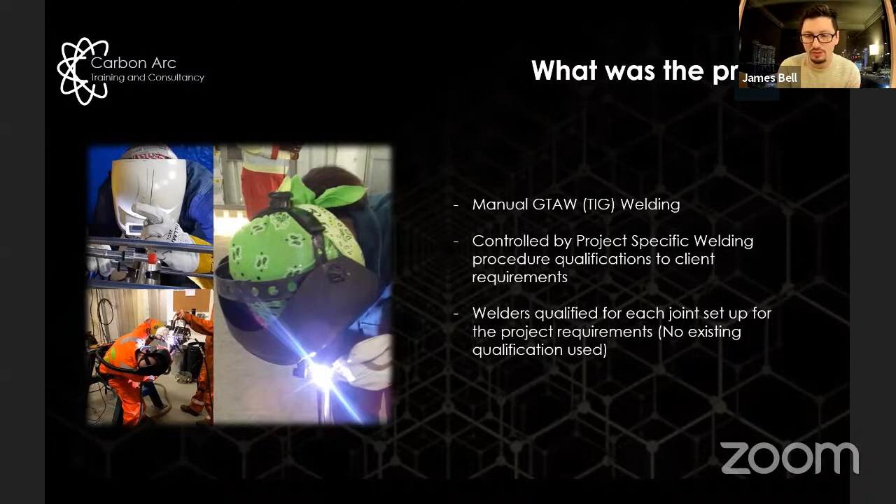If they qualified on a butt weld and they needed to produce a fillet, we had to do 2 qualifications, on every material grouping, on every thickness they would work to, etc. So everybody had been requalified for the job, procedures all brand new, and we had very good faith in what was happening.

The material was all super duplex UNS S32750 tube, again, produced directly for the project to order, mainly from Sandvik in Chomutov in the Czech Republic. And they're all small bore tubes. So they ranged from 12.7 mil to 1.5 inch, 38 mil ID, with a wall thickness between 1 to 2.5 millimeters. So these are very small tubes.

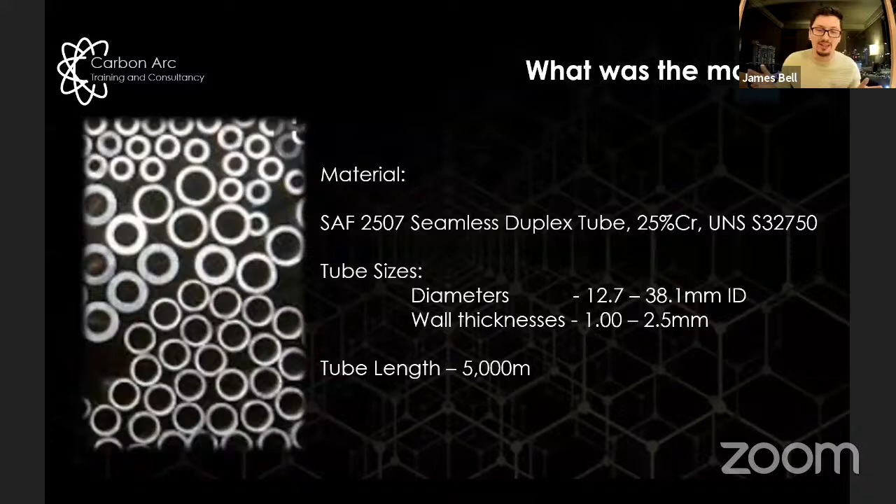Umbilicals are made up of not very many tubes, a bit larger than that. And they were delivered to us in 5 kilometer lengths on reels. So when we had a failure, we literally had 5 kilometers between our welds.

Now, the Fischer Feritscopes we were using, if you haven't had very much experience with them, are basically made from an iron probe in a plastic sheath, and they produce a magnetic field. And when the AC magnetic field comes close to the part, the ferrite content within the steel increases the voltage level, and the machine reads that to a corresponding ferrite reading. So you can see here, as the part comes closer, the magnetic field gets larger, the voltage goes up, and the reading then goes up.

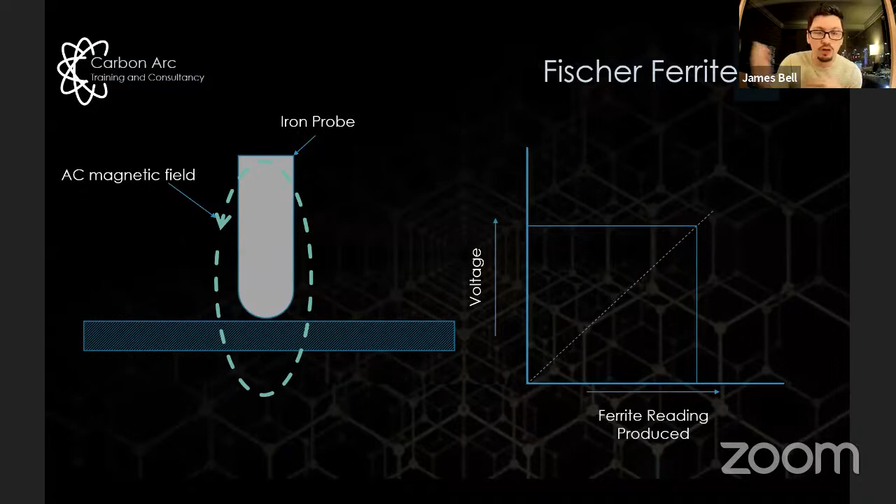And the way we calibrate that machine is to take a known ferrite sample, touch the probe on the surface of it, and set a reading of the magnetism to a percentage value. Yeah, so that's how it works when we use it in production. We're going to take the probe, touch the sample, and it's going to basically compare the reading we made during the qualification test: is it greater or less than that value, and what percentage would it be?

For our project, we had to take readings from 3 locations around the OD of the tube. So this is position 1, 2, and 3 on the left, with at least 120 degrees between each position. And then we would take, say, from position 1, the 12 o'clock position there, 3 readings from the weld metal and 3 readings from the heat affected zone. And the average of those 3 readings needed to be between 35 to 65% ferrite, which is the normal acceptance criteria for welds in super duplex material.

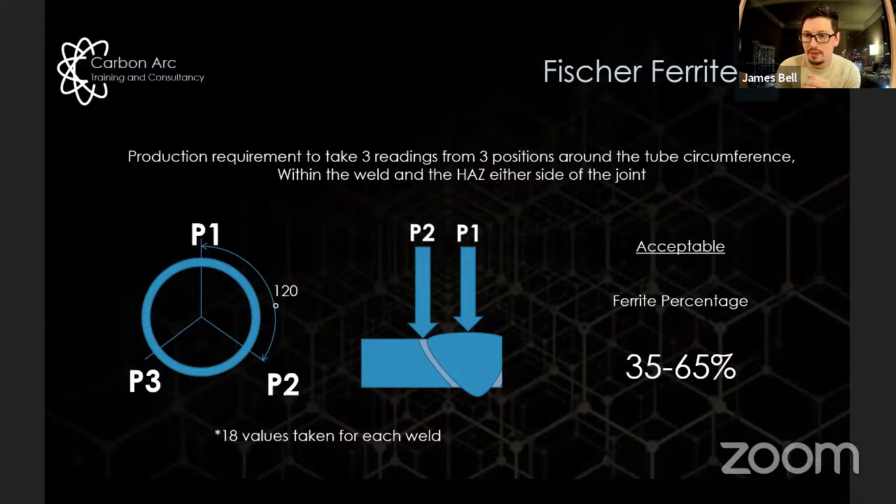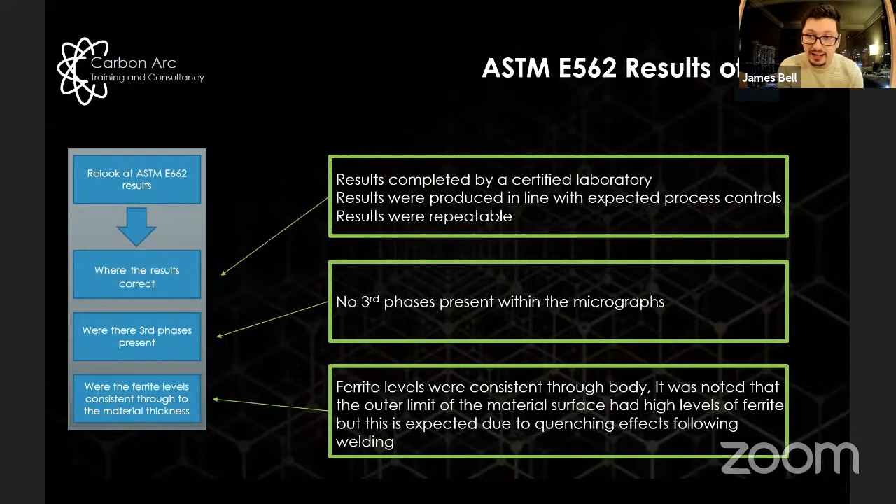Just one reason we could have lower or incorrect ferrite results is we've lost control of our welding process. Either the welders aren't welding correctly or it's not in line with our qualification data. Let's have a look. So we basically did a huge audit of our welding systems, and again, found enough pointers in the right direction to say, we're okay. Our welders are qualified, they're working in line with their requirements. We sent some samples for G48 testing as part of their qualification. We knew they could produce what they needed to do.

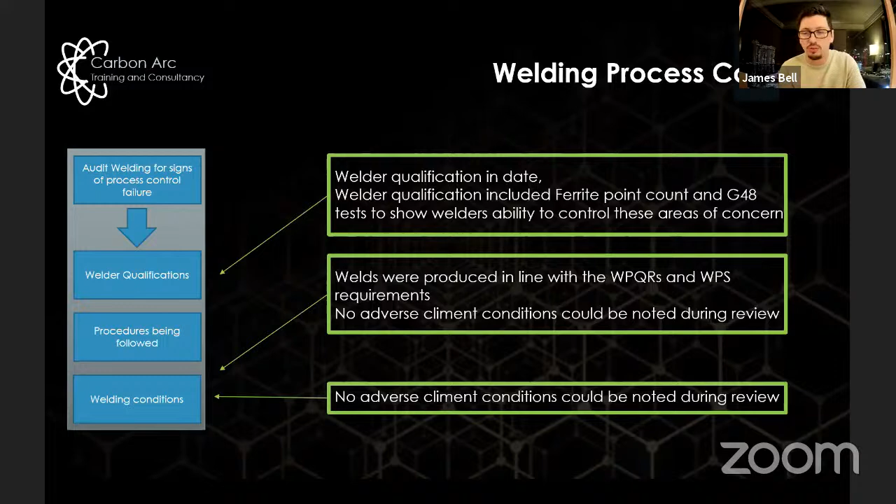So that then got us, right, our weld procedures are good. Our welding controls, we believe, are still adequate for what we need to do. Let's look at our materials. Where are we going wrong here? Now, as I said earlier, all of the materials are produced for order by the mill, and there's full control of that. We know exactly how that material is going to be produced, what it looks like, how it's tested. All that's done in a huge amount of detail before we get it as the umbilical producer.

So what's wrong? Quick, have a check, see where we are. Now, the material certs were correct. We did additional tests to make sure the material certs were correct. And everything, again, was fully in order, but we have this very, very high failure rate.

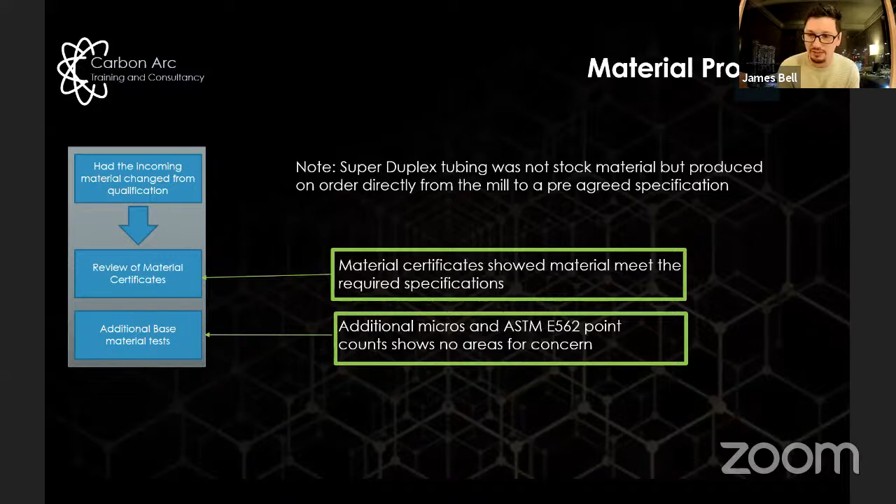So then we started looking at the equipment. Is the Fischer Feritscope in calibration? Yes, it is. Is it in good condition? Because we all know what happens with equipment when you give it to somebody on a work site. It normally doesn't last very long, but no, the condition was new. It was how it was operating. All our tests on the calibration blocks said, yes, this is all okay.

And then we did spot checks on the training of all of the operators globally and found that everybody knew exactly how to use the equipment. We could take them through a blind test on calibrating and taking test results, recording test results. We even went to the extreme where we checked that they were able to average 3 result numbers correctly, because we just couldn't work this out. And again, everything was green, everything was fine.

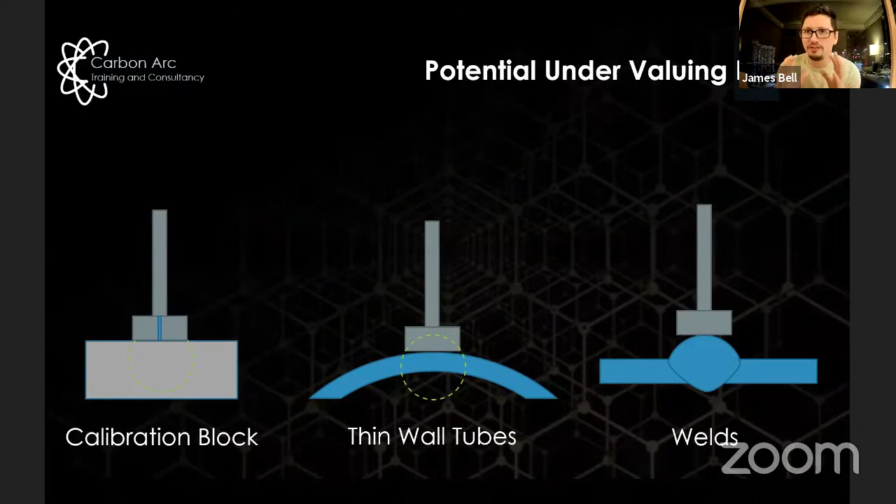Okay, that's a potential. And then what we also started to see was if it was hard to get into and the operator moved the probe left and right as they took the reading, it really threw the data out and some were passes, some were fails. We saw that if we brought the probe down at one angle, it would fail, but if we moved it, it would become a pass. So it's really starting to say, all right, we've got a fundamental issue with the way this NDT method has been applied.

Now, when we went back, of course, looked at the equipment, got as much data as we can, we could see that the scopes came with a conversion chart. Now, this was to take your reading and then have a percentage increase on your reading, basically on wall thickness and diameter of tube. Now, one of the main issues for us here was all of the conversion charts are based on ferrite number, not ferrite percentage. So for our project, we had to have a ferrite percentage pass or fail, not ferrite number.

Now, there was a lot of discussion at the time around how do we convert a ferrite percentage to a ferrite number, and it became a big bone of contention, not just internally within the company, but also between us and our client. Because how do you decide what a ferrite number is if you don't fully understand that a martensitic structure in your material is going to throw that out, what the phase balance is like, all that type of stuff. So very quickly, these conversion graphs became really a non-starter for us, and we couldn't apply that.

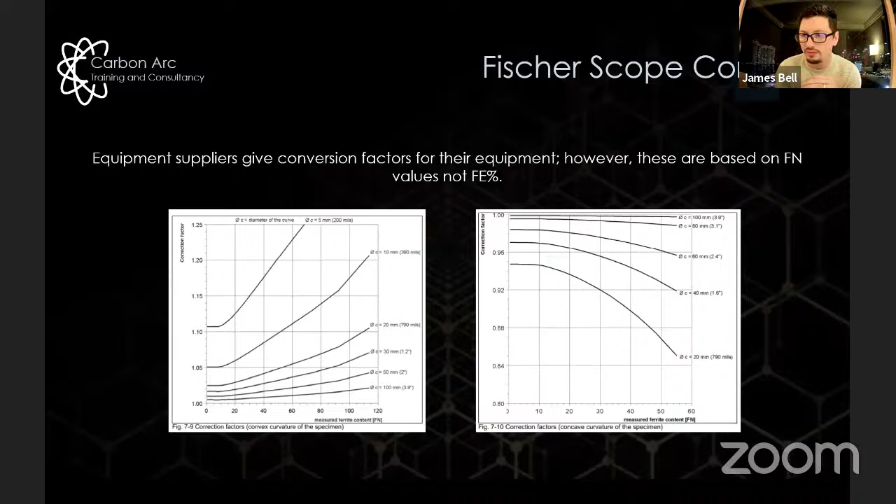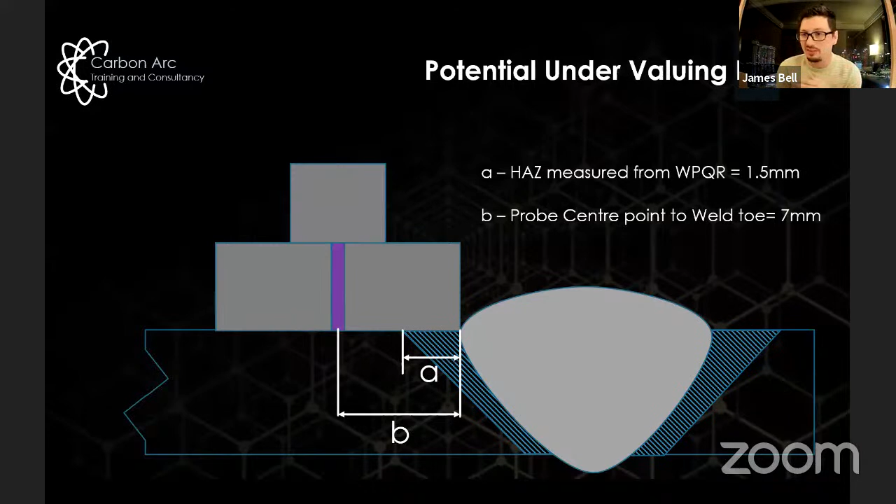What we also found was when we look at the heat affected zones that we were testing, when we bring the probe onto our weld, our heat affected zones measured from our PQRs were no bigger than 1.5 millimeters wide. The probe location at best was 7 millimeters away from that. So most of our probe was actually sitting in parent material, and we were never testing heat affected zones. Something else, just saying, is this process really what we want to do?

And then out of luck, and it really was luck, and this is the power of Googling, something I'd say we should always do as much as possible, but always be careful about what you find on the internet. Not everything people say is the right answer is the right answer, but there was an AWS journal on the predictive measurement methods of delta ferrite in stainless steel. And what it did, it basically compared data from 1920 all the way up on lots of different equipment for determining ferrite results.

And 3 things came out of this AWS journal, which were kind of a lifesaver to us and allowed us to really say what we're saying is real. It's not the way we're doing it. We're not taking our results and twisting them to fit a narrative we want to get a pass, but somebody else has seen this independently. So the first one was that the Fischer probes produce an inspection bubble of about 10 millimeters cubed, which we could see because we did get a difference between thinner and thicker materials.

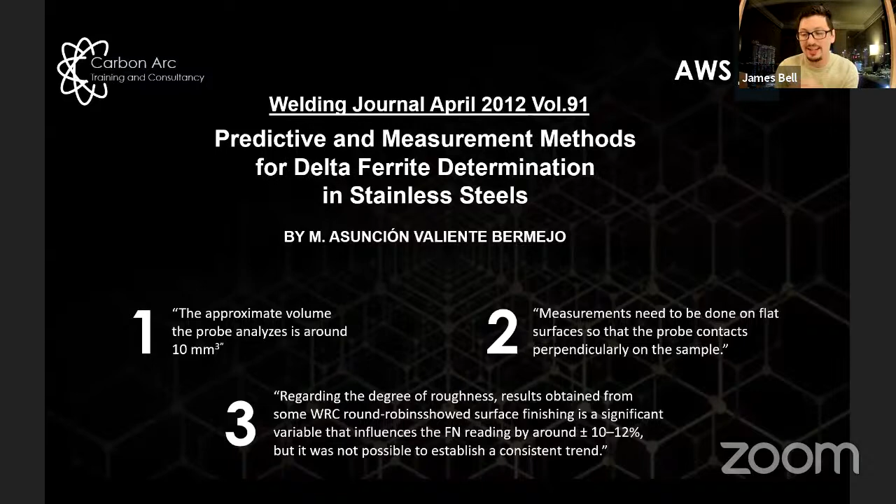Now, when you've processed material through a factory, the surface roughness is not the same as where it began, and that was a massive issue, and really said to us, look, we have the evidence now to move on to our client and ask if we can basically get rid of this test. So that's where we came to.

So our conclusion, when we looked back at our 4 detection options, was we were in a false positive area, but unlike normal, we couldn't accept the false positive because our downtime was too high, the cost was too much, and the overall impact on the project was not something we could accept, which was a big change for us at the time, because for the 5 years previous to that, we had been fairly happy just to cut out and run and not really think about it.

So what did we do? How did we get out of this situation? Well, we went to our client, we wrote a deviation request and said, okay, Fischer ferroscope allows a good assessment of in-process welds, but it can't be applied to thin wall tubes. And it's definitely an issue when we're looking for ferrite percentage rather than ferrite number.

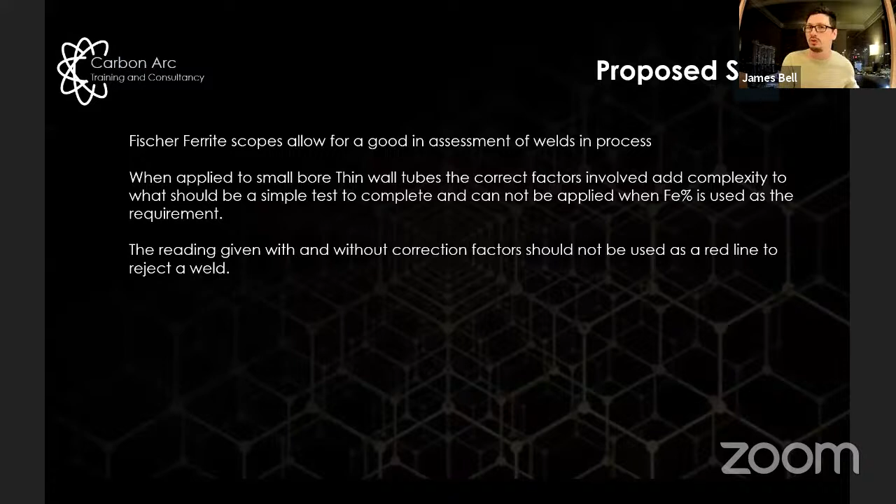Because the correction factors can't be used, and we can't use these tests to produce a definite pass or fail on a weld. We can use it if we want a rough idea about where we are, but not to say it's a pass or a fail when all of our NDT methods and all of our controls say that weld is a good weld. So we use it just to see if it's roughly where we need it to be.

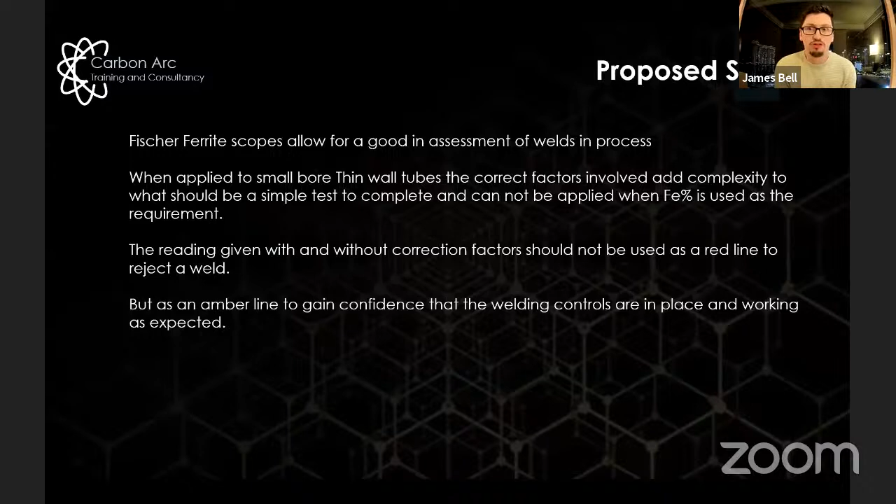What we ended up seeing as the close out with this last point was that for every procedure qualification we do, from the same location, we will take ASTM E562 point count data and Fischer ferroscope, test it, and produce a tolerance on the Fischer Feritscope reading. We ended up agreeing that the Fischer ferroscope readings could be down to 25% and still be okay. Once it got below that, we'd need to do extra tests to make sure it was okay.

Now, we believed that was a good way out. However, I could probably write a whole different presentation on how to deal with a client's expectations and maybe the way that clients write specifications potentially to get deviation requests so they can ask for something else. That's only my view on it, but we got there. We got to a point where we got an agreement, but did it get us into a position where we had a foolproof way of removing Fischer ferroscopes for all projects? No, because our clientele needed to see Fischer ferroscopes on a project.

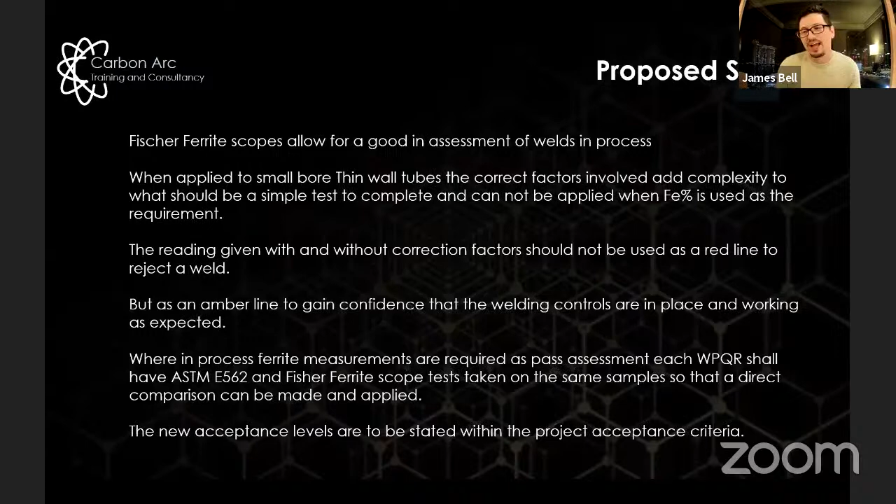So like I say, I wanted to take you through how we dealt with an issue as we came through a project. It's not an R&D study. It would be a great big R&D study, I think. And anybody who had the time and the resources to do that, I'd love to help them out, because the Fischer ferroscope is a good test if it's used correctly and the expectations around the test are correct. Don't use it as a go, no go. Use it as a quality assurance. Let's make sure we think we're in the right ballpark.

So yeah, I hope that was interesting. And I'll hand back for any questions.

Thanks, James. I think there are a couple of questions. First of all, I like the analogy with your false positive and false negative. This is pretty much like COVID, you know. It's all right to have a false positive report where you get isolated and don't harm others, but a false negative, you could ruin a lot of other things. So yes, I think what you shared is quite practical and very, very critical. These are small but really

impactful discoveries along the way, because clients mostly do put in requests for certain tests without having detailed application know-how about them. For example, small bore, the probe itself would be difficult to get there, and that can create havoc. And I don't know how many you repaired before you really got to the stage of analyzing it. A lot of cut and repair would have gone in.